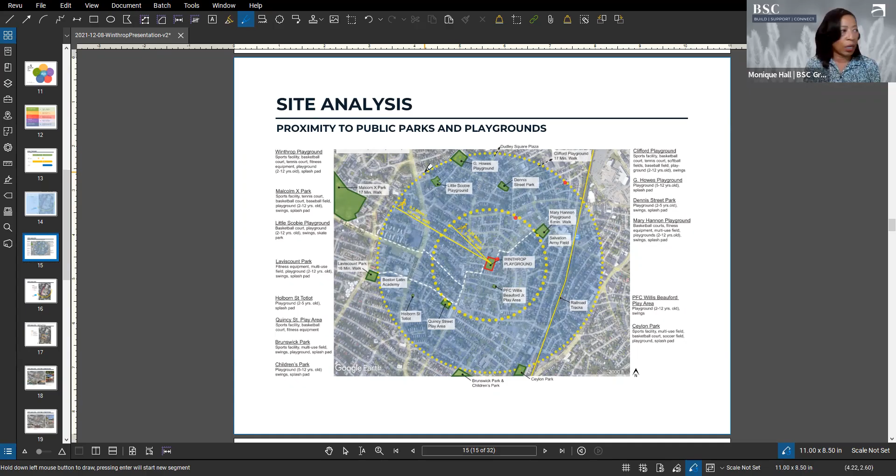What this graphic really tells us is that the majority of the parks and playgrounds within close proximity are mostly play areas—there's a limited amount of sports courts and open field. I believe there's a basketball court at Little Scobie. Mary Hannon Playground has open field areas and basketball courts. Outside of that, you really need to go to Malcolm X Park and Clifford Playground, which requires crossing Blue Hill Avenue and several other large suburban streets.

With regards to the site analysis, this is an aerial view with north up. At the top we have the John Winthrop School, and adjacent to the school in the center is a splash pad area, flanked on 2 sides by 2 play areas—a smaller 2 to 5-year-old playground and a school-age playground for 5 to 12-year-olds in general. Just south of that, we have a basketball court and a tennis court, fenced on all sides, and then there's an open field area with some scattered outdoor fitness equipment. There are large light poles that light the area.

The area is also flanked by sidewalks on 2 streets—Danube Street to the east and Dacia Street to the west. Along Dacia Street, there's a large length of a purple line representing a significant retaining wall, up to 10 feet in height, which is kind of a barrier to access to the playground. This image also tells us that the path of the sun moves across the playground from east to west, and the prevailing winds come in from the west.

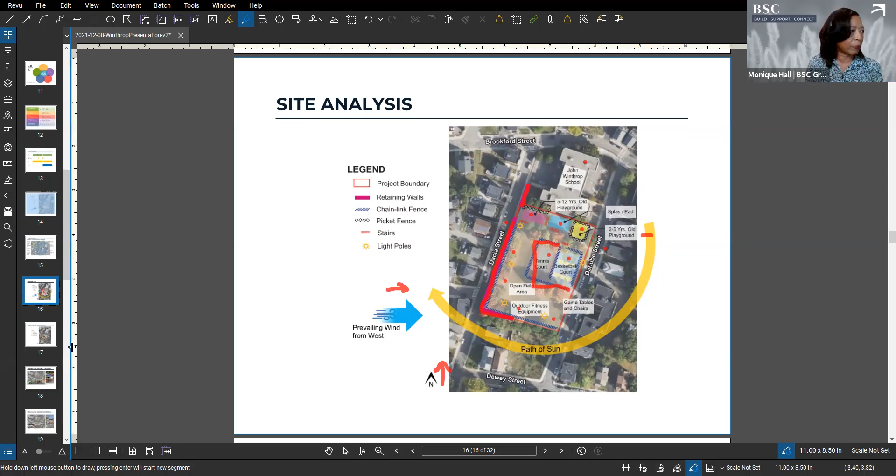This next slide shows pedestrian circulation through the park. General access to the park is on either Dacia Street or Danube Street. There's a series of 4 orange asterisks representing the entry points. One entry point on Dacia Street requires the user to go up through a set of stairs to access the park, which means the accessible routes to enter the park without using stairs are all along Danube Street. There are 3 points shown with the orange asterisk—1, 2, and 3.

With regards to accessible routes from Danube Street, if you want to access the school or playground areas, you'd come in, turn north, and make a U-turn to access the toddler play area, which is a 2 to 5 age group. The splash pad is located in the center, and then you could go back west to access the school age playground, for 5 to 12-year-olds. To access the fields, you'd come in from Danube Street and head south, or enter from South Danube Street. That's pretty good access. For the basketball and tennis courts, there's a single access point here.

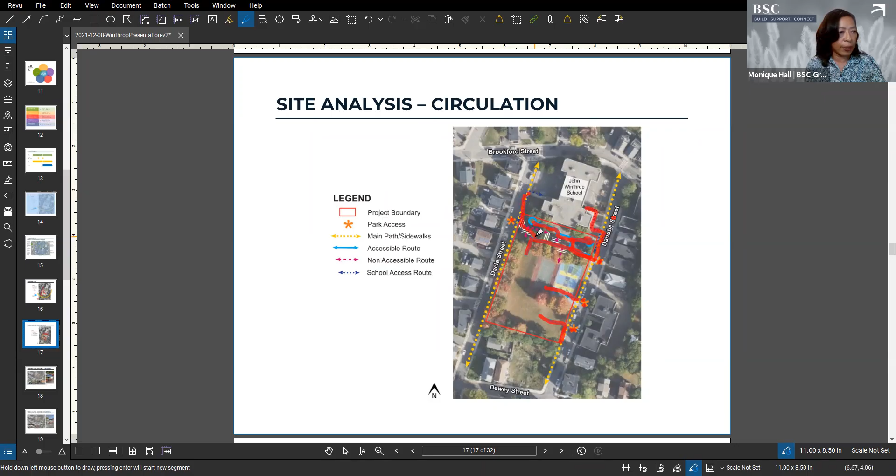This is a bird's eye aerial showing an overview of the park, and we've got a few images that depict the existing conditions.

At the tot lot, we see that there's a limited number of play elements. We have a slide, a post and platform climbing element, and another climbing element. So we're really limited to 2 play elements for the 2 to 5 age group.

For the school age, the 5 to 12 age group, we again have the same post and platform play equipment. We have a few more activities, which are the monkey bars, and there's a little climber that you can slide up and down on.

Looking at the rubber surfacing, we see that it's worn in some areas and darkened in others. With regards to the 5 to 12 area, this area is heavily shaded by some large trees. The tree canopy is very dark and dense. It creates a kind of cove element, and it can attract other activities other than schoolhouse play.

The splash pad is located between the 2 play areas, and we've noted that it's limited to a single spray feature. There's not a whole lot of different spray elements there.

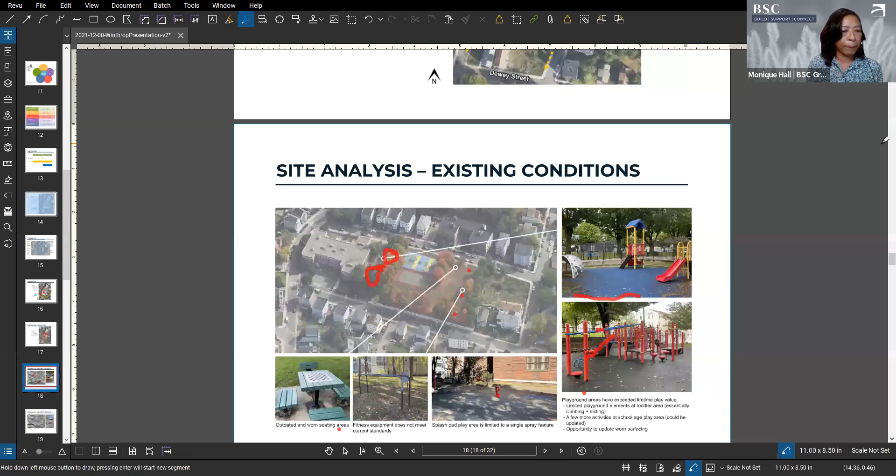With regards to the surfacing, we know that the tennis courts were resurfaced within the last couple of years. That was just a superficial site improvement. We recognize that there are some drainage issues, cracking issues. There needs to be a little more done for this next round of improvements.

We've discussed the stairs located throughout the park, but also the basketball courts in their central location. Because it's a court sport, there are some high chain link fences, which also block views throughout the park. We also want to note that the paving transitions could be improved, and some of the existing concrete infrastructure is crumbling.

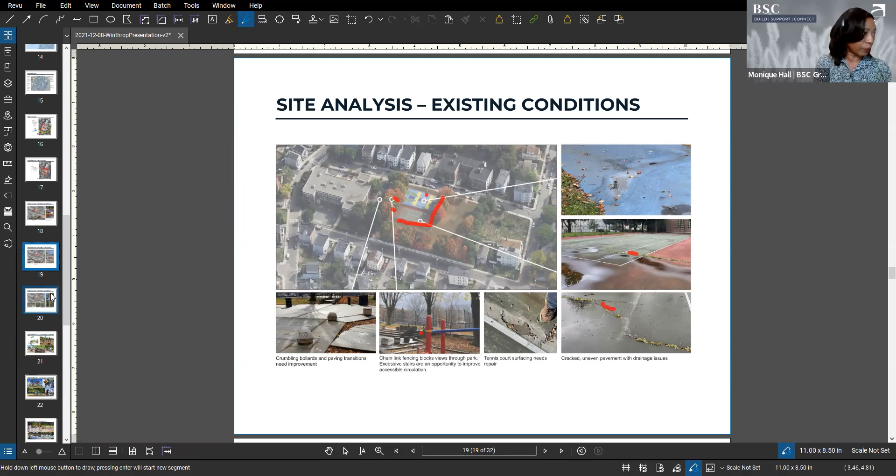With regards to the outer edges along Dacia Street, there is a retaining wall that is leaning and cracked, so we'll be looking to make improvements to that wall. At the other wall, it's in pretty good condition - we don't believe improvements are needed there.

With regards to lighting, there is some lighting throughout the park that is the newer LED, and also some older incandescent light fixtures. We will be doing a light assessment to ensure that we get even illumination throughout the park and that all areas are appropriately lit.

With regards to the tree canopy, I noted earlier that some of it is very heavy and maybe provides too much shade. So there's probably an opportunity to prune and limb up some of the trees and open up a little bit of sunlight into those play areas. We'll be looking to assess the trees.

For example, where we have open wounds, that's an opportunity for infestation. We have some trees that are grown into fences, and some trees that are dead. We'll be looking at the trees to make sure that if they're in a state of decline, they get removed before they pose any potential hazards in the future.

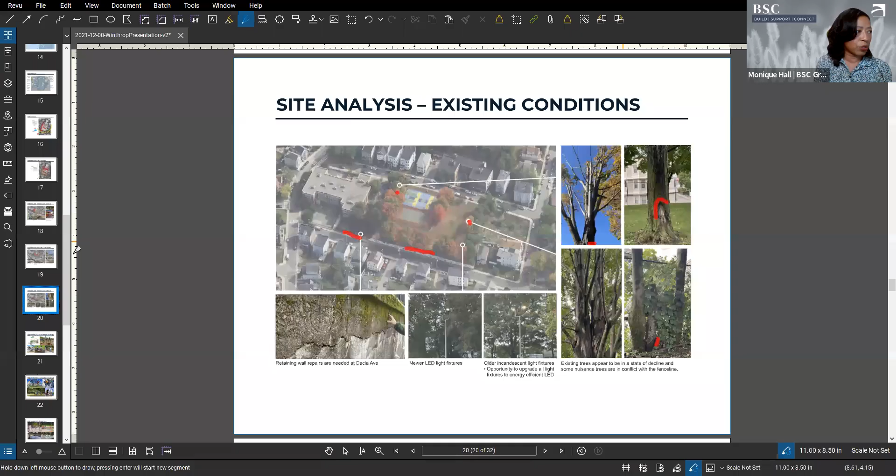With regards to play equipment, we really do like the post and platform kind of play equipment. At the 2 to 5 year old, toddler age, we're looking to provide some more activities beyond just climbing and sliding. For example, we have spinning, we have balancing. We also want, where possible, to include equipment that is inclusive for all motor abilities.

And Nate, do you want to say some more about the play equipment at the toddler age? Yeah, so again, going back to those 5 elements, which is social, physical, cognitive, sensory, and communication. Just looking at these pieces here, I have a 5-year-old who will not climb on ropes at all. So oftentimes, if there's a play feature that is just ropes, she ignores it completely and would walk along and balance on a curb as opposed to the ropes.

So with what we're looking at for possibilities, we want some feedback on what you think you would want in the play space there. But we're also not looking at the play equipment as the sole source of play. We're going to be trying to come up with some ideas on how the entire playground space can have play value, have spaces where children can gather, can communicate, can do these types of play and really utilize the entire space.

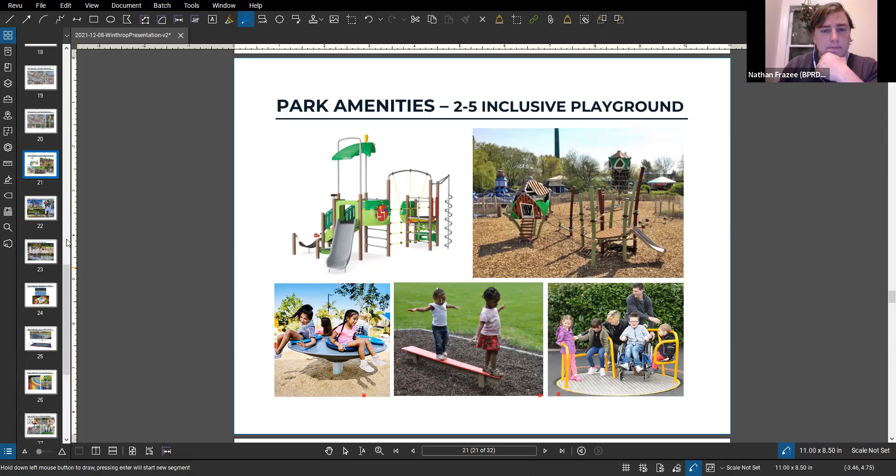So with regards to the school age play area, we think there's an opportunity to enlarge the play equipment itself so that we can fit more users on it. For example, we're seeing these kind of rope structures and climbing structures very popular, not necessarily with the smaller kids, but with the bigger kids.

I think there was feedback for the provision of swings, and having swings that are able to fit more than one kid at a time helps encourage group play. And then again, we'd want to have as many activities and as many users be able to use the park as possible. So here we have a piece of equipment that involves balance and coordination.

And Nate, do you want to say anything else? Yeah, no, that was great. Speaking about the swings, while I was flyering I got to see several kids, and that's one of the big things that the kids were asking for - could we get swings there? The footprint that swings take up is quite large, oftentimes with only 1 or 2 kids being able to use it at a time.

So what we like is the idea in this upper right corner, what we call a dish swing - like in this photo, you can see 5 kids on that one swing, which takes up the equivalent space of 1 to 2 swings otherwise. It allows for a lot of social interaction and communication. You can have multi-generational kids ride it with caregivers. So there's a lot of value in that, and it really offers an opportunity that this park doesn't currently have.

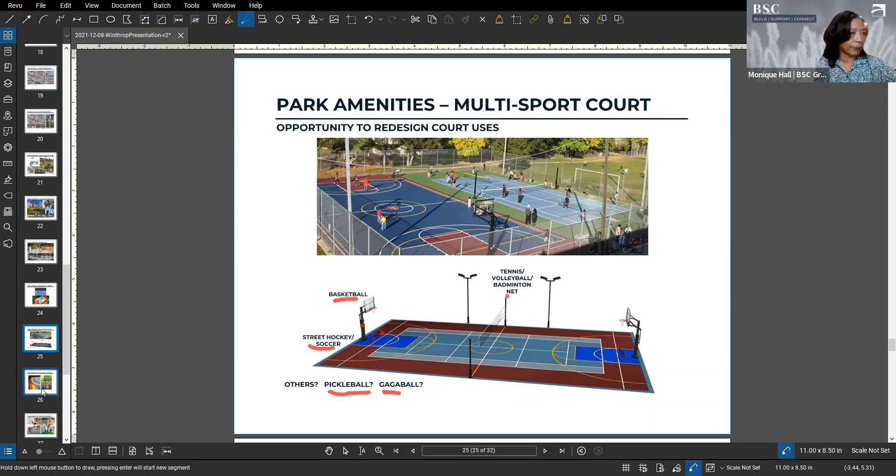One of the things we're seeing with lots of parks, playgrounds and courts is the opportunity to do a colorful toddler or tyke track around the court. When I was a kid, the big wheel was my thing, but I could safely ride anywhere down my street and sidewalk. In a dense, heavily urban area, you can't ride your big wheel down the street, so is the sidewalk even the better place, or is the best place within a fenced court area? We'd like to hear that from the group as well.

Fitness equipment: we recently put in some new fitness equipment at Mary Hannon Playground, this particular set with magnetic bells, which is excellent in that you can do like 60 different weight exercises, and it's all stationary. There's a mechanism so if you drop it, you won't hurt yourself or drop it on your toe. On the signage there's a bunch of activities illustrating how to use the equipment.

If you download the app, you can see additional exercises. If you set up a profile, it will track your progress, set goals for you, the whole nine yards. There's an opportunity to either match some of the equipment at Mary Hannon, or do something different, so maybe Wednesdays is a workout at Mary Hannon and Fridays is a workout at Winthrop Playground. That's just something to think about. There's a variety of exercises you can do with the new play equipment, and we're excited to offer this into the area.

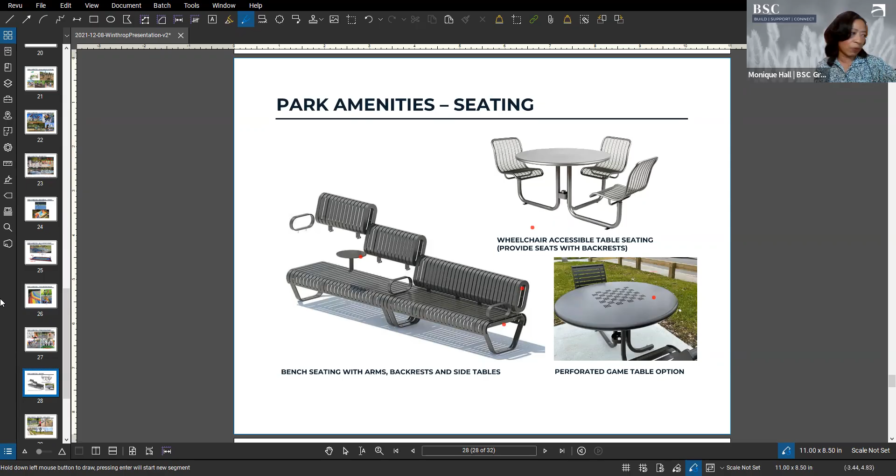I believe the playground has Wi-Fi, so there's an opportunity to do some side tables with tablets. When it comes to the actual table seating, we noted there are some game tables out there. One of the ways we upgraded the game tables at Mary Hannon was to incorporate the game pattern into the design of the table, so you could do chess or checkers. Is there a need for backgammon? There's an opportunity to customize that so it benefits the community in the way they'd like to use the park.

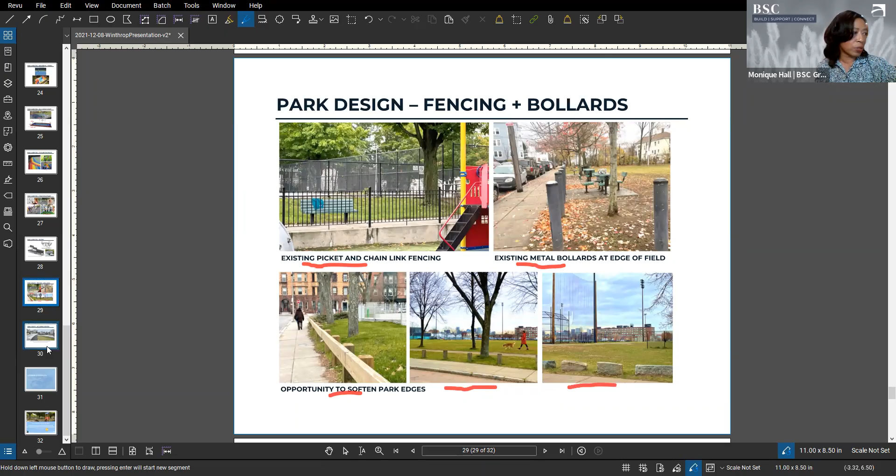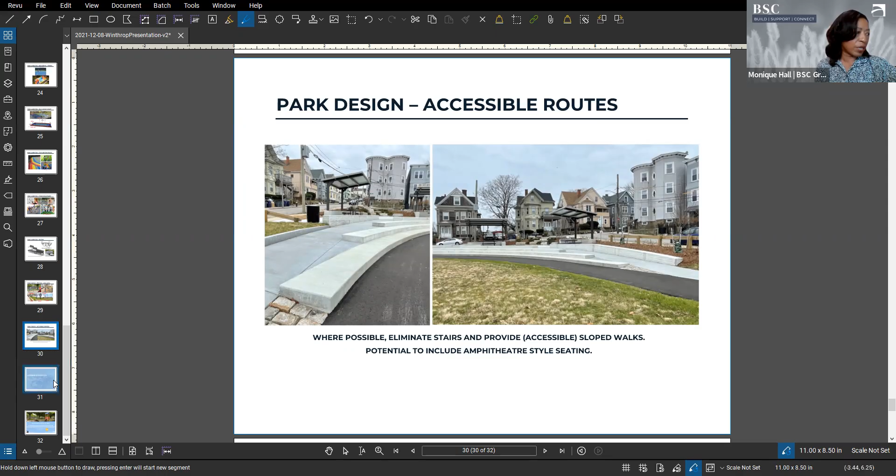So I think we've presented you with some food for thought. I'm going to ask Nate if he has anything else to say. If not, we're going to turn it over to the community portion.

One thing I want to clarify is that earlier in the presentation I said the second meeting was on January 17th. I misspoke and had that incorrectly labeled. It's actually the 19th, so I'll be correcting that on all the flyers posted to the project website.